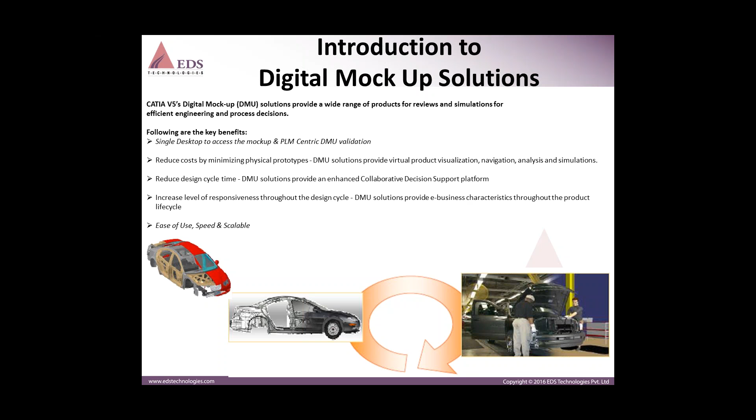First time right part and assembly development, life cycle driven engineering, account for manufacturing cost and process during early concept and design decisions. So any issues after making any assembly or in process planning we can detect in the early phase. Enable knowledgeable decision early in the development process.

That is, extended enterprise commonality, implement standard methods and processes throughout the supply chain for improved co-development, optimize derivative programs, sustain continuous improvement and leverage existing intellectual property in the same virtual environment, maximize reuse in derivative programs, short ramp-up time, implementation and achieve rapid value, minimize program risk, maintain productivity.

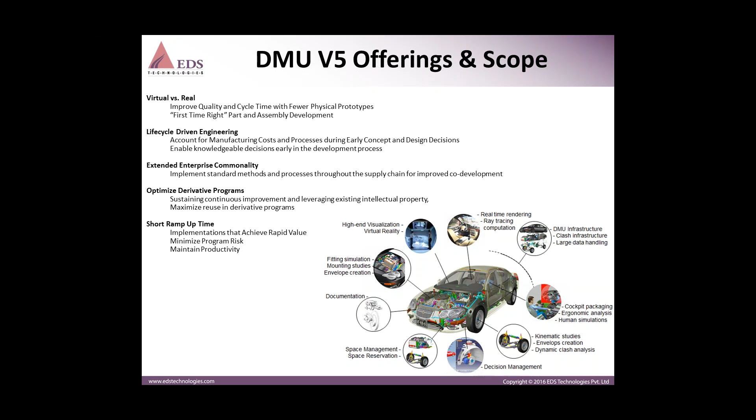Okay, so it is for digital prototyping, analysis, and simulations. The results of CATIA analysis or any third-party analysis you can view here as post-process images.

The DMU V5 solutions can address indifferently digital prototyping and review for small and large digital mockups, review of technological data related to DMU, including functional tolerancing information, FT&A information in 3D, finite element analysis post-processing shapes, like von Mises stresses or deformation and translation images we can see, and we can review that.

No need to go with GPS or GS environment to open the data. For plant and shipbuilding data, BIW fasteners information - whatever BIW fasteners are created in ABT license or automotive body unit licenses, those we can view in the fasteners review product.

DMU analysis with sectioning and measurements. DMU spatial integrity analysis with detection of interferences and clashes, completely in dynamic.

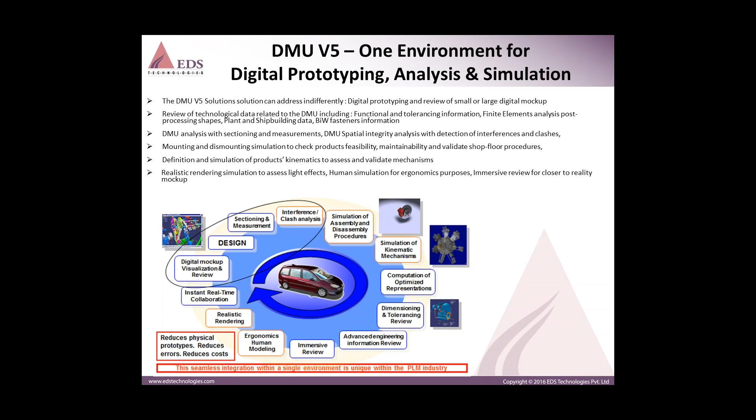DMU for the entire organization: using DMU solutions we can share complex product data across the organization for collaborative decision making, in the same CATIA environment. Only the product will be different for different people.

Synthesis teams, senior executives, technical publication, project leaders, designers, customers, dealers, sales, maintenance, suppliers, purchasing, shop floor workers, quality people, and production engineers - these people can use this for review or other purposes.

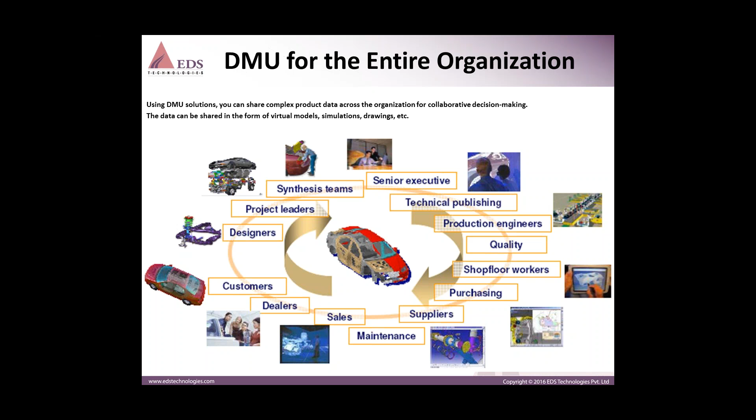DMU can be used by different user profiles in an organization, based on functional needs and DMU capabilities - designers, quality people - these are the verticals where people can use it.

For visualization purposes - viewing, printing, redlining, measuring. Customers like suppliers, dealers, sales, and purchase people can work with this.

For immersive reviews and virtual reality, designers, quality engineers, project leaders, synthesis teams, and senior executives can use this.

Simulation and definition, advanced analysis of interferences, and computation review - the DMU review and authoring team can use this, which includes synthesis teams and project leaders. So from high-end application to wide enterprise users, there will be users across the board.

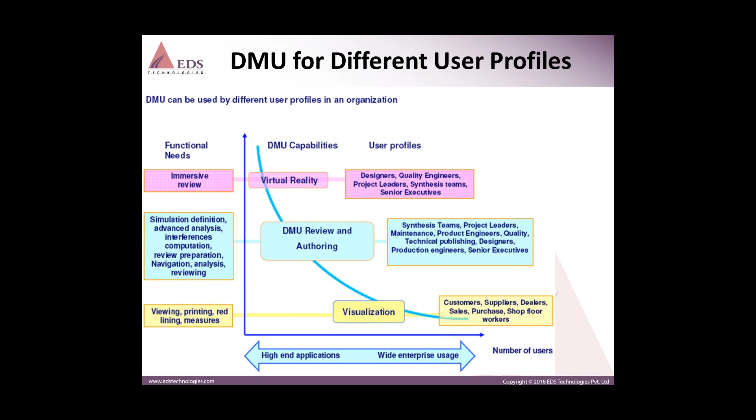We can create scenes. We can create distance band analysis. Sectioning we can save inside the application node. We can generate annotation views for review purposes. We can save interference check results.

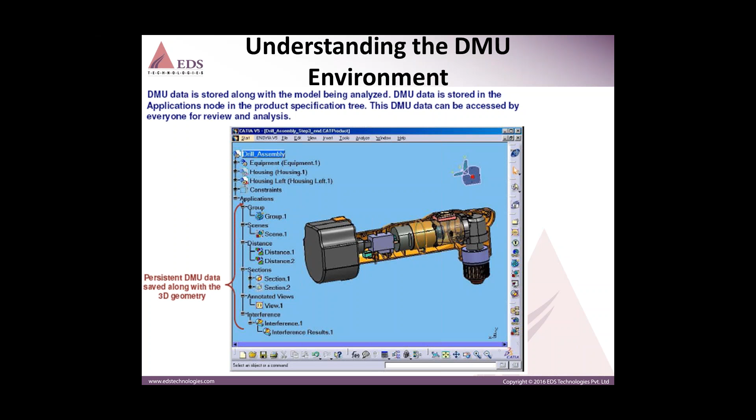This is a simple user interface. The product tree is there, components will be there, and the application node in which we can set some cameras. We can make groups.

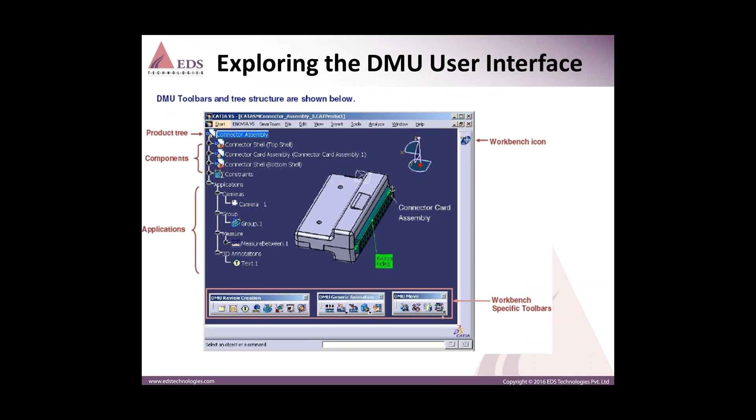The terminology is like this - if you see here, this is the general CATIA specification tree: root assemblies, components, and whatever the application is under the application node.

Suppose a sub-assembly is there - whatever we have created in DMU will go into the sub-assembly. And in the main assembly node, whatever scenes or DMU mockups we have created, it will come into the main assembly.

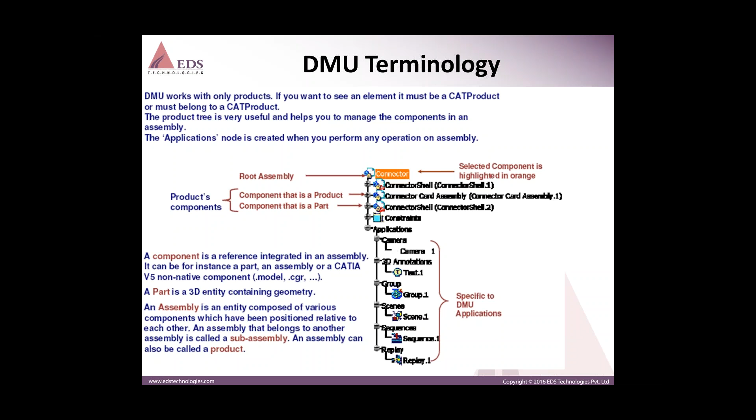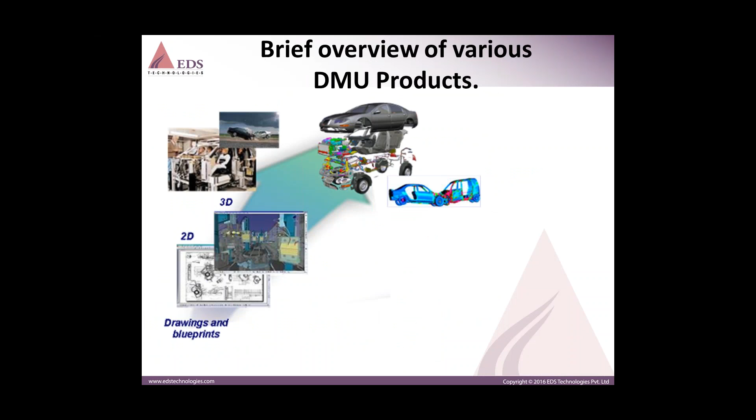Brief overview of various DMU products. DMU solution offers a wide range of products for performing reviews, presentations, and simulation of digital mockups of various sizes, from consumer good assemblies to very large assemblies like airplanes, cars, plants, and ships.

These DMU workbenches can visualize the assembly using tracks and simulations. We can create manual tracks, or create functional simulations to simulate the assembly's motion or disassembly process - both different products will be there.

Review the model using scenes, annotations, and presentations. Perform measurement, perform interference analysis, analyze sections. Reduce the size of the mockup using alternate shapes with the help of DMU Optimizer.

Simulate the assembly and disassembly of components with the help of DMU fitting. There will be DMU space, navigation, plant shape, engineering analysis review, and kinematics, which is mainly for simulation studies, fastening reviews, and DMU fitting - these are the complete DMU products portfolio.

Here, DMU Navigator is there. This is one product which provides collaborative review visualizations and navigation and communication capabilities for mockups with the help of tracks, cameras, or hide/show capabilities while simulating and creating mockups. It supports a large set of 2D and 3D formats, provides advanced measurement capabilities, allows optimum 2D viewing and 3D navigation for DMU inspections, and provides real-time rendering features.

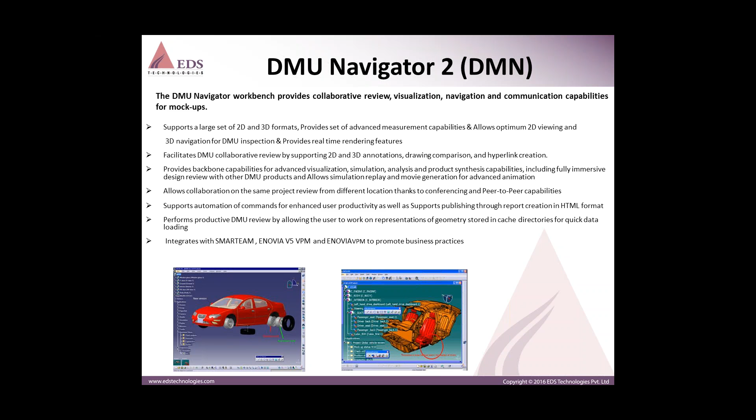It allows visualize and navigate capabilities with high rendering on large amounts of data, and DMU collaborative review by supporting 2D and 3D annotations. So these are the capabilities available with the help of DMU Navigator. Mockups we can create.

Here, this is the screen of DMU Navigator. So here, these observers we have created, some tracks we can create here. These are the toolbars. With the help of these toolbars, we can create a simulation player. Tracks we can create, sequences we can create for presentation purposes.

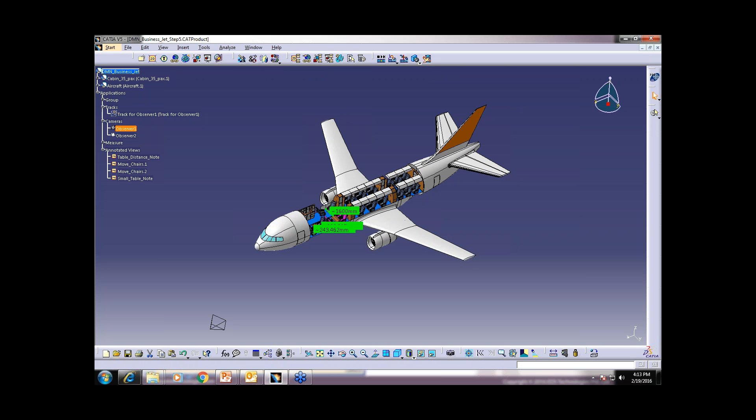We can highlight some clashes. We can publish with the help of some annotations. We can set hyperlinks, we can put annotations. If you see here, it will pop up some observers. So these cameras we can put in any cases.

DMU Space Analysis provides the capability for measuring and analysis of mockups, like creation of sections and exporting its geometry for other different reviewing purposes. It will measure and save the data inside your application node.

It enables optimum DMU verifications using advanced interference detections and analysis, superior sectioning, like thickness measurement if you want. This is not available in general cases, but if you have an SPA license, thickness measuring options are also available, along with superior section analysis, measurement, distance analysis, and 3D geometry comparison tools.

We can compare two geometries, revision 1 or revision 2, to see what modifications or changes were made. It will be highlighted with a color code.

It will measure sections, allow you to section, measure, and perform clash capabilities available in CATIA Assembly Design, but sections cannot be saved inside. There will be some limitations compared to those offered by SPA. In assembly, there are limitations to saving - we can create a section, but we cannot save or export the 2D geometry. If you see it in preview mode, this cannot be exported.

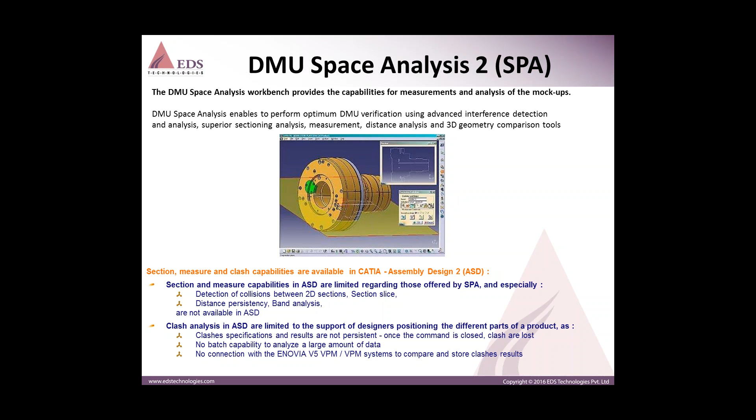Once the command is closed, clashes are lost - it will not save inside your product or assembly. There are no batch capabilities to analyze large amounts of data, and no connection with ENOVIA VPM and VPM V4 or V5 like PLM or BDM systems. So in Assembly Design, these are the limitations, but these can be offered with the help of DMU Space Analysis.

We can compare 3D geometries, visualize the result in a dedicated viewer, save the result for reuse, and perform sectioning on those 3D roles, those 3D color codes in a 3D environment.

There is integration with other DMU products for distance analysis of motion, simulations, and animation of section results. It allows automation through VB access for clash detection and band analysis, which we can use while creating kinematic simulations, to check interference in interactive mode or batch mode for large amounts of data.

It provides a set of exact measurements on and between products, parts, and features, distance and band analysis tools in color code, and allows analysis and storage of results in ENOVIA.

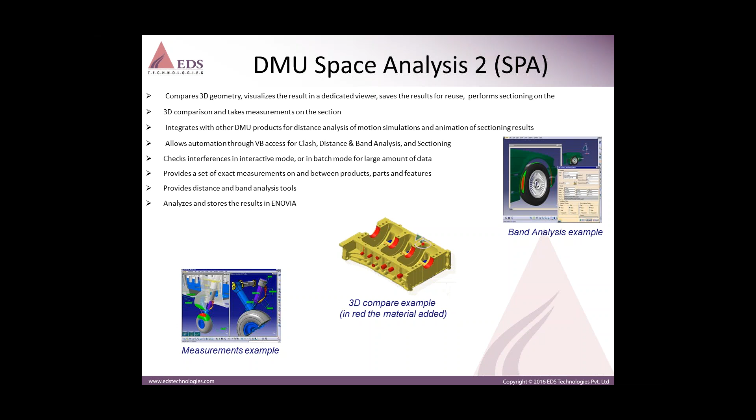These are some examples - analysis, 3D compare examples, red the material added. So there are two products which are superimposed, measurement examples. These are the capabilities.

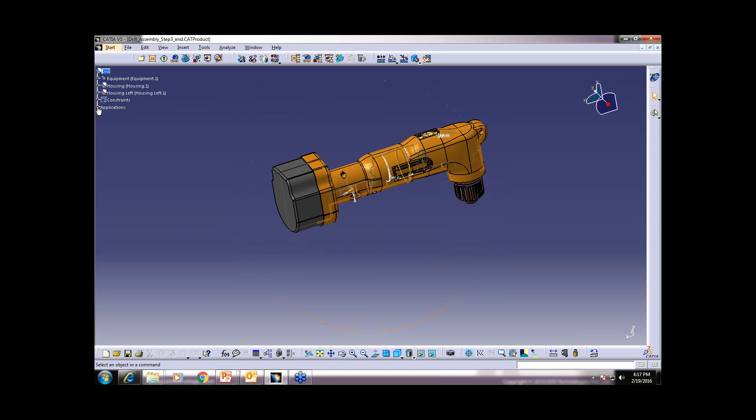In application node, some sections are already here. These sections are exported and inserted in this assembly. If you see these lines, these are the sections which are created here.

These sections we can export with the help of these commands, which are available with the DMU SPA license, not available inside your simple assembly design sectioning commands. With the help of this, we can reuse these curves and analyze, whatever color you have given to your products, it will highlight with that.

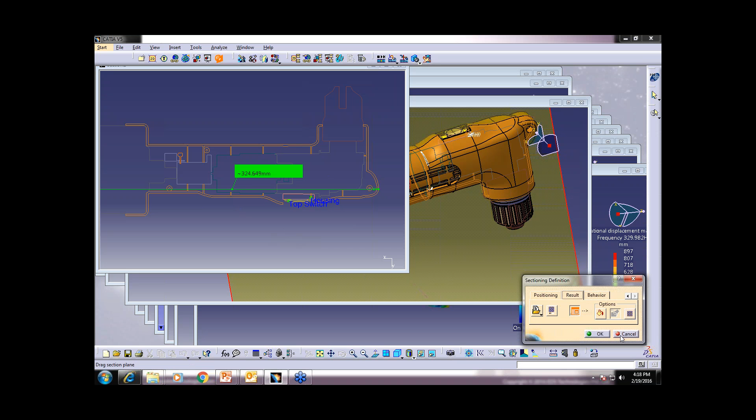We can put views and all, everything it will be detected here. Distance and band analysis, in color code, it will highlight it. So these capabilities are available in DMU space analysis.

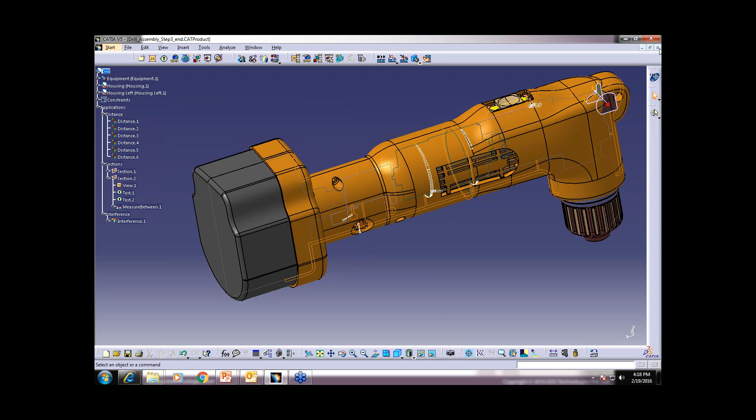In DMU fitting, we can do disassembly and assembly process with the help of some tools for process planning or feasibility studies. It is a dedicated tool to definition, simulation, and analysis of assembly and disassembly operations.

These operations help you to validate the product design with respect to the feasibility of its maintenance operations. Define single object or group of objects. We can make a number of components. Suppose 4 bolts are there, so you can apply in 1 bolt, and update that for other similar type of parts also.

Define single object or group of objects to move during the disassembly procedure. Generate disassembly trajectories, avoiding collision and respecting angular limitations. Interactively simulate object trajectory with visual feedback.

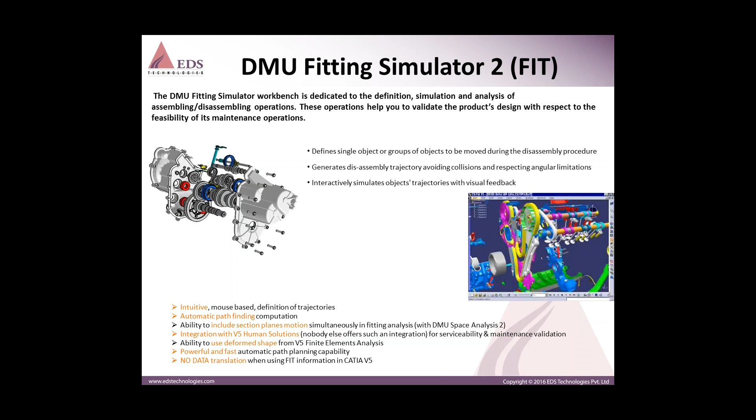Dynamic analyze simulated trajectory in order to validate their feasibility. So while creating dynamic paths, dynamically we can create the paths while moving your compass from one location to another. Automatically we can set snap kind of things. So while moving the compass, it will create the path.

Integrate with other DMU products for powerful combination of simulation, mixing clash, kinematics, or human manikins. Generate useful information on the space reservation in assembly, allowing designer to modify the digital mockup while respecting maintenance feasibility, with the help of swept volume. If you see in this image, this swept volume is created, and we can insert it inside our assembly.

Provide sophisticated simulation tools to increase collaboration between all project members and generate compelling marketing materials such as videos. It allows design validation packaging processes for product design, recycling, serviceability and maintainability departments, and integrated with kinematics solution also.

Exchange and downstream process, sharing design and packaging validation with suppliers, team members, customers. No need to send your native data, you can send only that swept volume, so people can understand, okay, this is the reserve area for this.

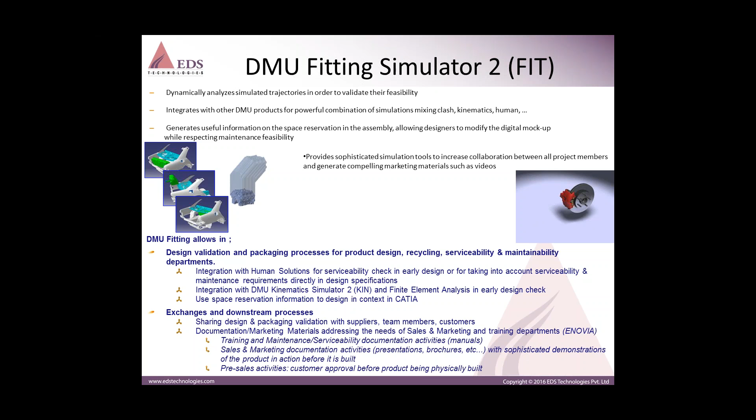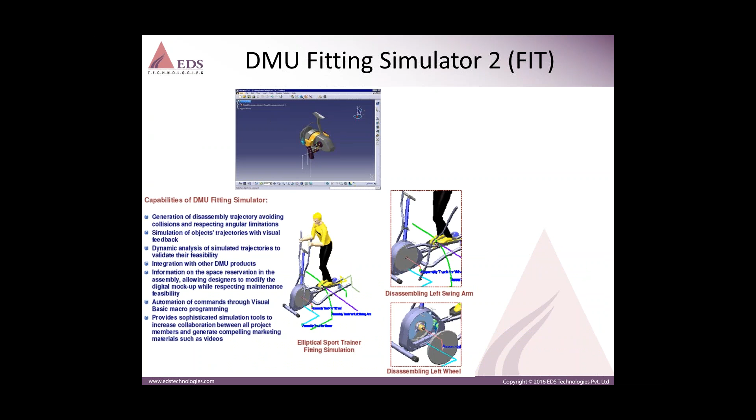If you see here, a small example of some disassembly of this.

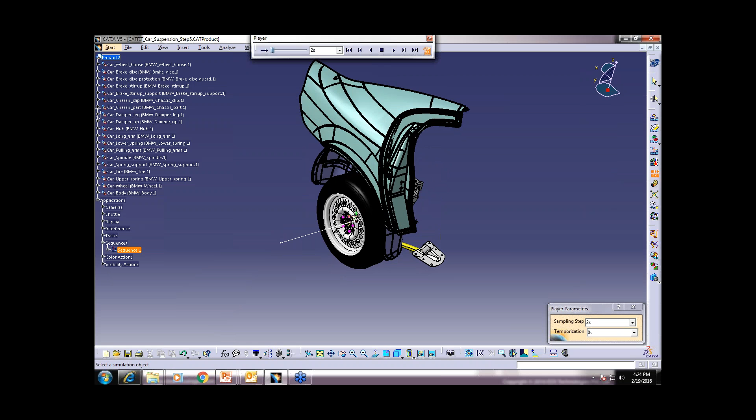So I have given some color code visibility also, so while removing, it is changing its color. Those visibility actions we can give, hide and show also we can give, so you can set a number of different colors. And at the end, it will be in hidden mode. So for any presentation purpose or any other review purpose or training purpose, it will be the best solution.

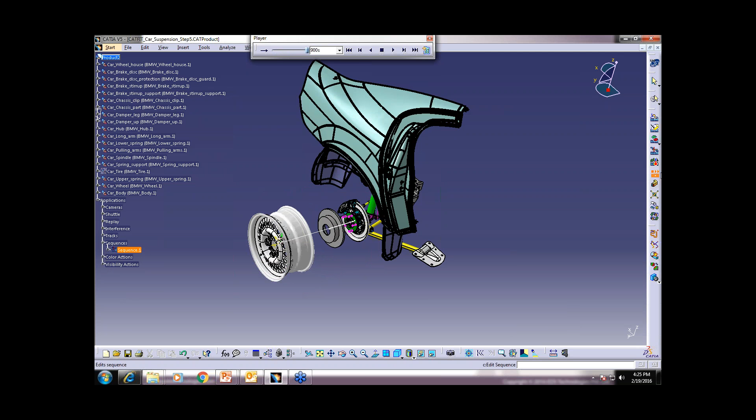Kinematics is a very strong tool to make a study of motions of whatever assembly mechanism we have created, whether it will be in good condition or have enough space for its functions. It may be a rotational function, a translational function, or point-surface functionality. It has a huge set of commands, like joints, which will completely fulfill our need to simulate any mechanism.

The DMU Kinematics Simulator workbench enables users to define, simulate and analyze mechanisms for digital mockups of all sizes using various joints, or by generating them automatically from assembly constraints. Any assembly constraint, like contact or coincidence, you can convert into a joint command, like revolute or prismatic joints. It is intuitive and mouse based, very user friendly: mouse-based direct manipulation of mechanisms allows easy comprehension of possible motions.

It offers the widest variety of kinematic joints, including point-surface and curve joints; with any involute or any kind of curve or point you can make a joint. Dynamic clash detection with unequalled performance during simulation. Ability to include kinematics and fitting simultaneously using sequences. Hide, show, or color actions created in fitting can be incorporated inside these kinematic simulations.

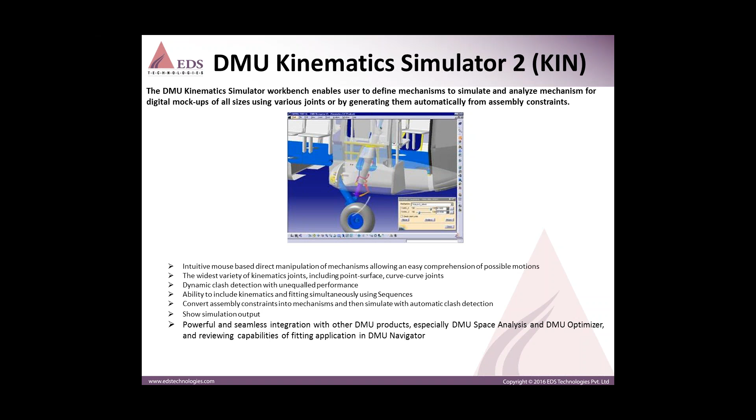Use a wide variety of joint types or generate them automatically from mechanical assembly constraints in ASD products. Easily simulate mechanism motions with mouse-based manipulation, or you can use a player. Analyze mechanism motions dynamically with visual feedback to check limits and interferences and compute minimal distances. The kinematics created here is logical, mathematically based. We are not just giving a distance or speed and it moves accordingly; it moves functionally. If your input is 70 RPM for 360 degrees, we can simulate that with a specific time or law.

Even the gear ratio is automatically detected with the help of the addendum and dedendum circles of gears. It records motion analysis results to increase accessibility of simulation results, generates the trace or swept volume of moving parts to drive further design, and allows combined simulation through integration with DMU products.

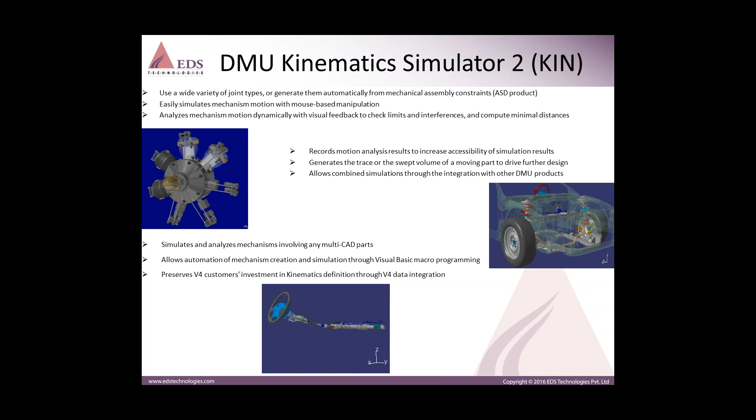It will simulate and analyze mechanisms involving multi-CAD products, allows automation of mechanism creation and simulation through Visual Basic macro programming, and preserves V4 customers' investment in kinematics definitions through V4 data integration. Model files or any other V4 files you can integrate and insert. These are the capabilities: automatic generation of mechanisms from mechanical assemblies, and simulation of mechanisms in order to validate them.

If you see here, there are some joints we have incorporated. This is the structure of this mechanism. We have created a lot of joints: revolute joints, cylindrical joints, slide curve joints. Many joints are there. All types of joints required in our industry for the simulation of any mechanism are available here.

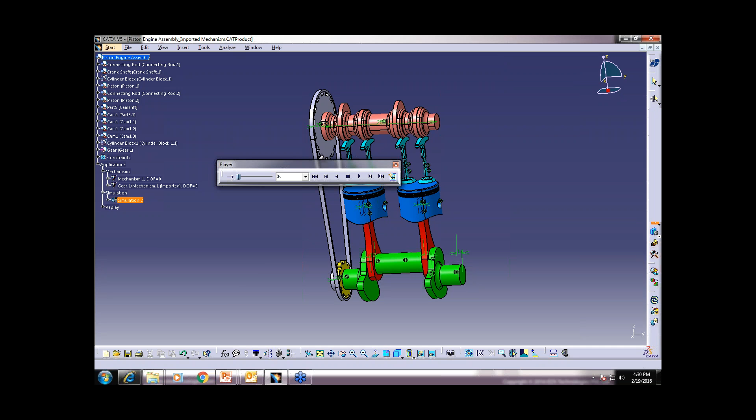We can simulate with the help of this player. We can make it a slower speed. It's too slow. So with this simulation, we have given it according to the functions, and it is not dynamic, it is only kinematic simulation.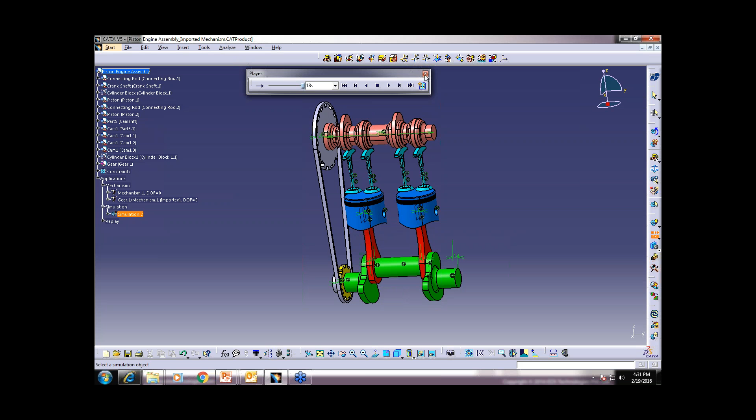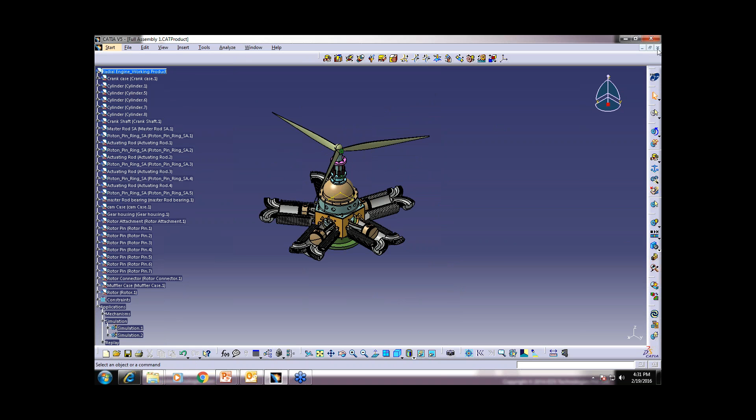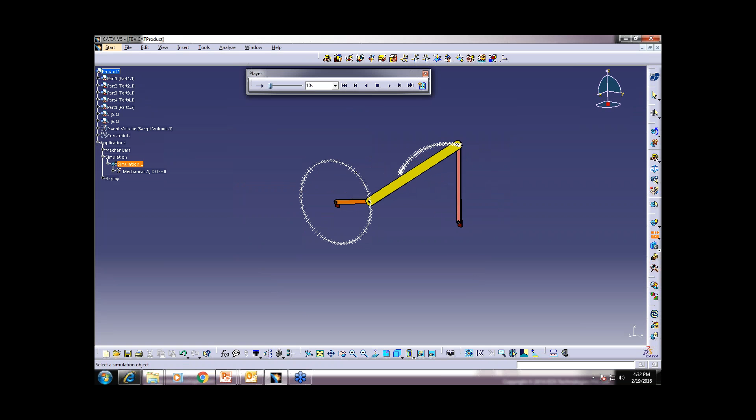Here we see a small assembly. This kind of mechanism we can also simulate, or we can generate its swept volume, to see how much swept volume it occupies. So here we have created a swept volume for all the components.

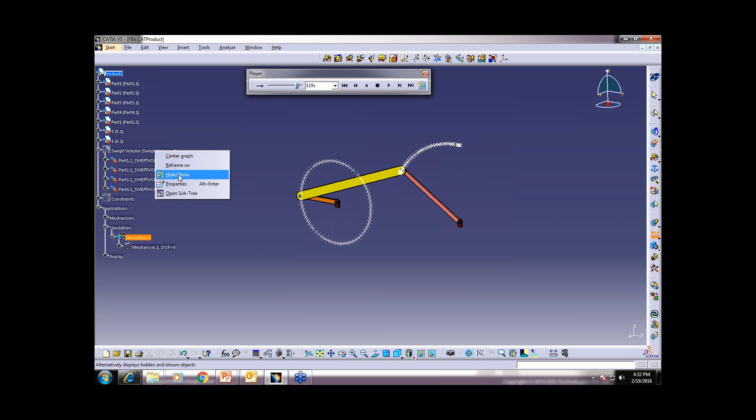We see here the swept volume we have created. It is the area of travel occupied by this component, so our design should be according to this. This review capability is available with DMU Kinematics or fitting. So we can create a swept volume with the help of this.

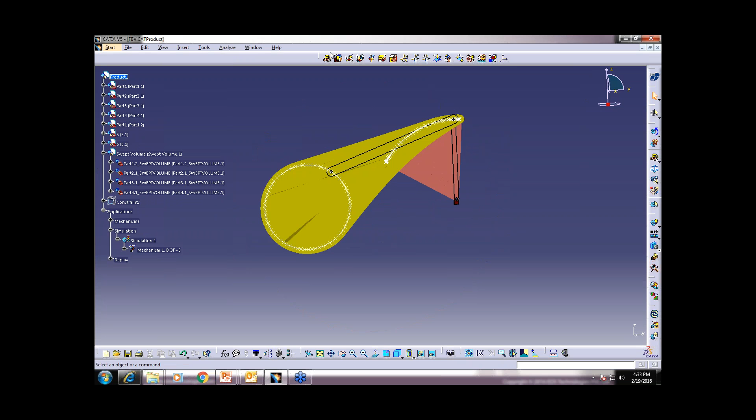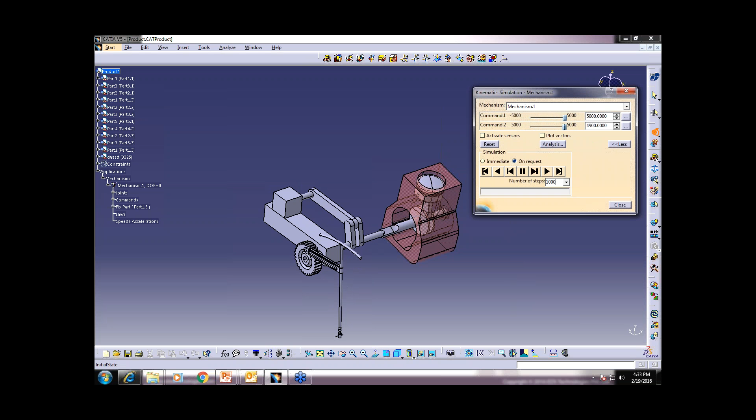Generally here two commands are there, but it should be one command in any case; only then will our mechanism be proper. In some cases it is not allowed to create one single command, so in such cases we have to create two commands. It is too fast. So this way we can create it.

Here we have created many joints, including cylindrical and prismatic joints. So we can create logical joints, and this simulation will be logical. It is not just that we have given some distance and it travels accordingly.

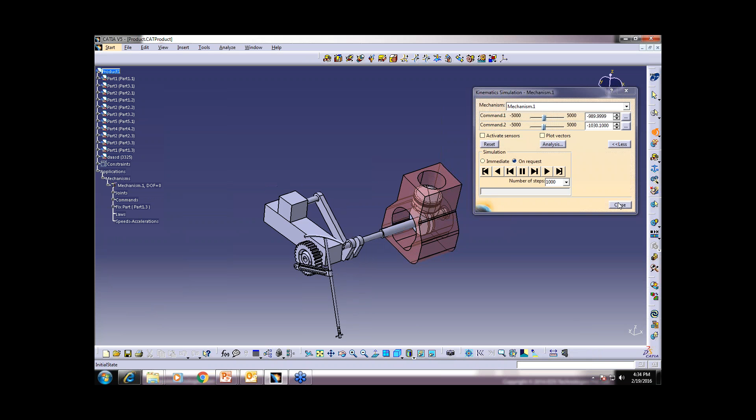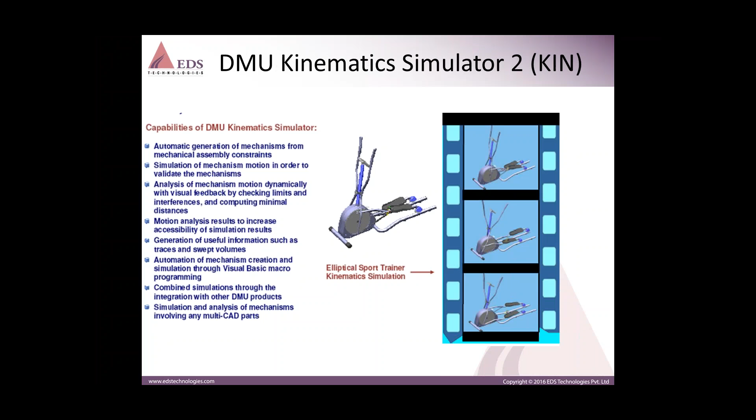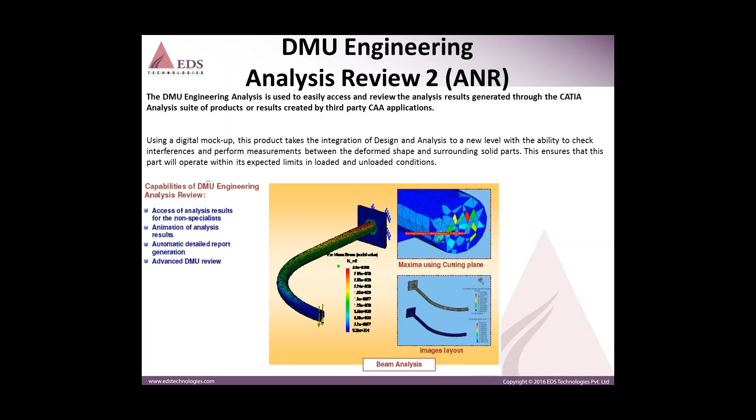Analysis data browsing, geometry feature based pre-processing specs, FEM based data images. These images we can visualize with the help of this DMU product. Standard analysis tools, automatic HTML reporting of analysis cases. The same is possible in GPS/GAS also, but for review purposes they can see it here. Wide range of post-processing tools. Integration to digital mockup for space analysis, fitting, player, or publishing tools. Publishing tools means we can mark up annotations or text in the review folder. And it doesn't require any GPS/GAS prerequisite.

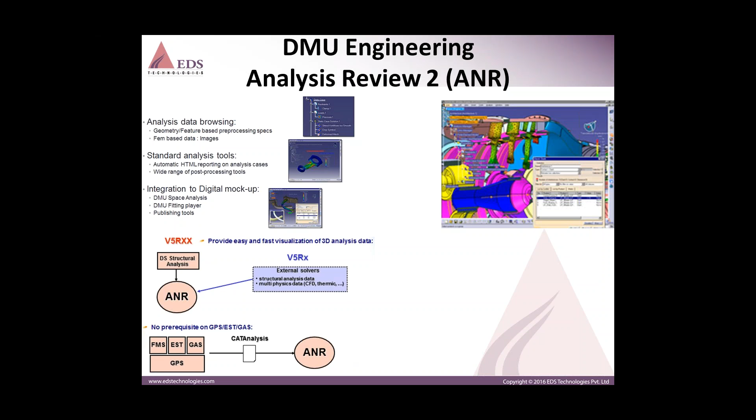Here, if you see, these are the images we have created. This is DMU Engineering Analysis Review, the workbench. The review purpose tools will be available here. We can generate an image from existing images, or we can generate the report with the help of these toolbars. We can add the images and save at specific locations, static case or frequency case.

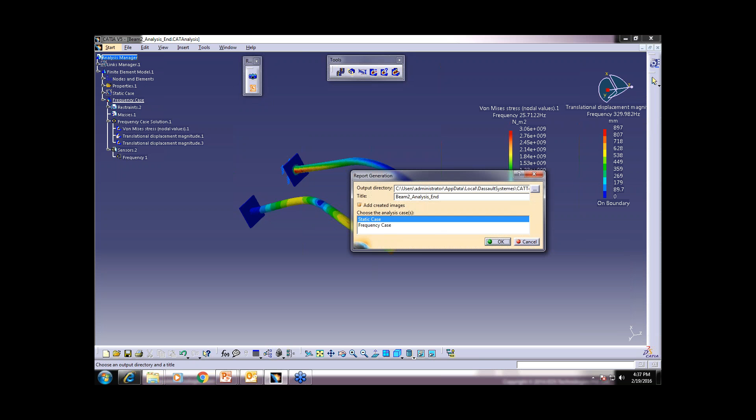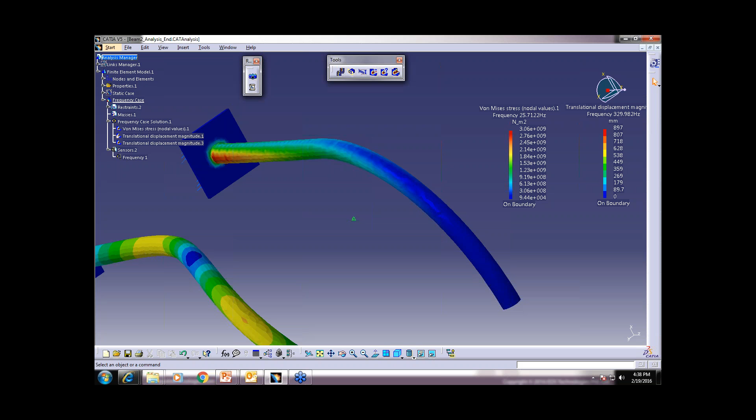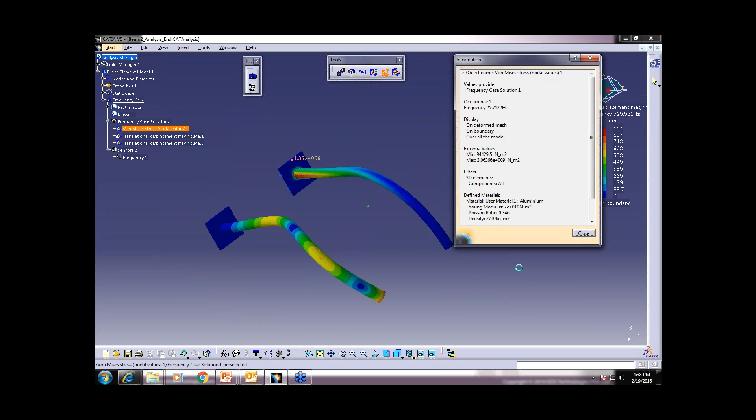So here the same results are available. We can even animate: suppose this von Mises stress we have to animate, we can see where the stress is moving. At this corner, the red color is the higher stress concentration area, and the scale is available here, for translational displacement, and this for stress. We can see maximum and minimum with respect to material, or we can see the information of this von Mises stress, what frequencies are there, or the static case.

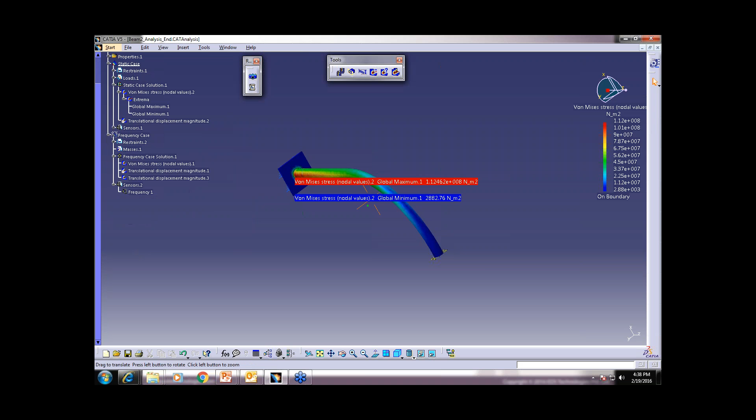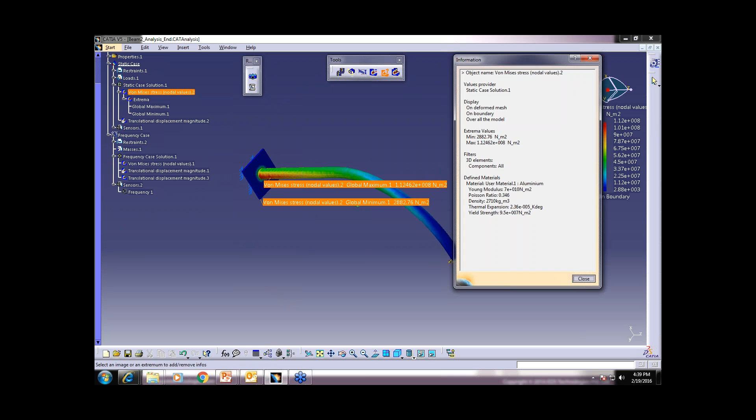Set as current. Here we can get the information regarding this. The maximum stress will be this and the yield strength will be this. So it is going out of range, and the factor of safety. So this model is going to fail at this location where the maximum stress is coming, so we need to change the design. These capabilities are available with DMU Engineering Analysis Review. We can review here and publish all those reports.

DMU Fastening Review is the tool that provides advanced fastener technology validation and documentation capabilities for automotive BIW design and product planning processes. Using DMU FAR, users can create and visualize body in white fasteners' functional annotations created in CATIA Automotive Body in White, including 3D fastener annotations, for instance weld IDs and build parameters, and we can pick those points. And 3D fastener series annotations, for instance weld series IDs and fastener series count numbers.

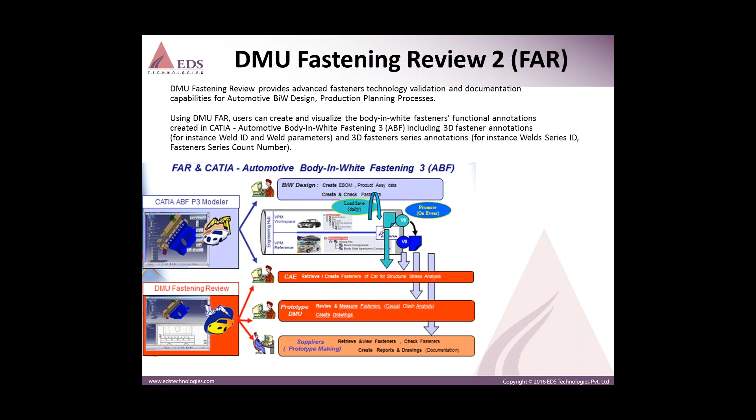If you see in the image below, FAR and CATIA Automotive Body in White. Body in white has very large capabilities for BIW components. With DMU Fastening Review we can review major fasteners and create drawings for those points, weld points especially. It allows visualization of those points. We can search the fasteners by properties, measure those 3D points, check the design, review it, and simulate mechanical behavior.

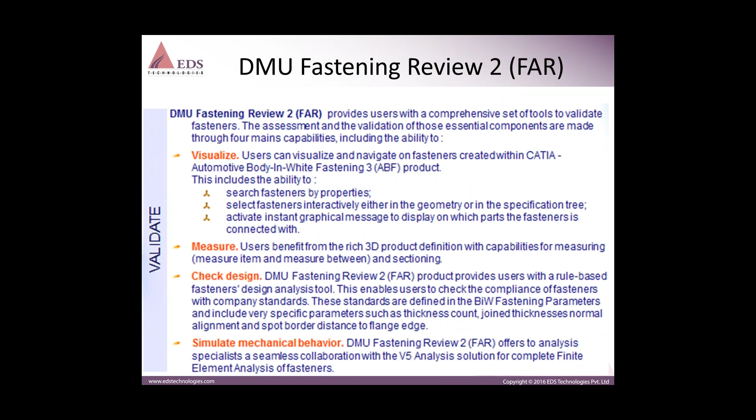We can review and publish the fasteners for further review with our clients. We can generate a complete report for fasteners and use it for analysis purposes, and create fastener drawings, because that data will not come if you save as IGS or STEP. So for that, this report is required.

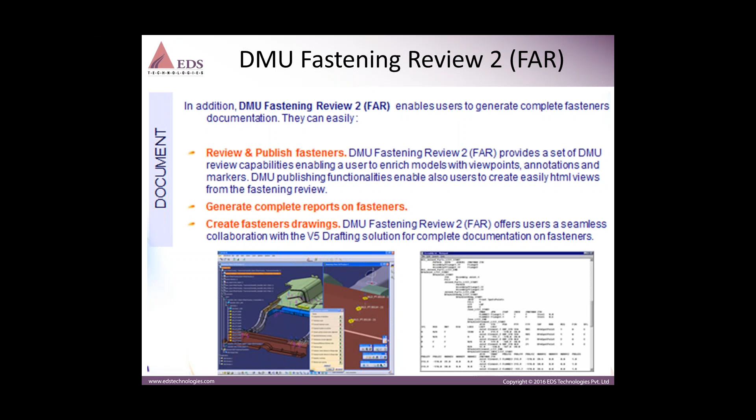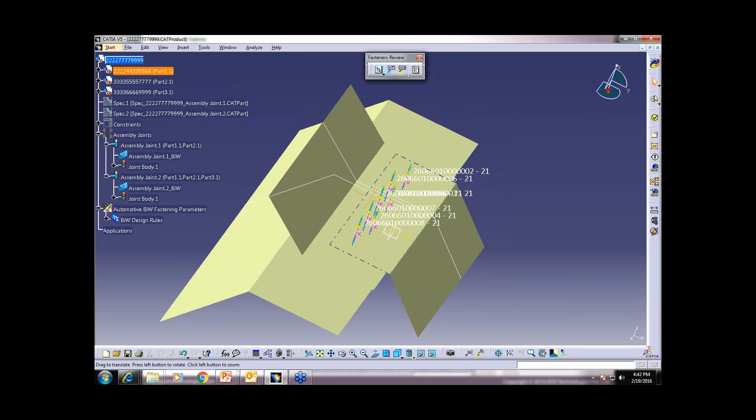If you see here, these are the weld joints created with Automotive Body in White, which is a P3 platform. I am able to pick this point because I have the DMU Fastening Review license. Otherwise we cannot pick these things; it is non-pickable because it requires a license. For the points we created, we can generate reports with BIW reporting, and this text or HTML file will be saved at a specific location for use.

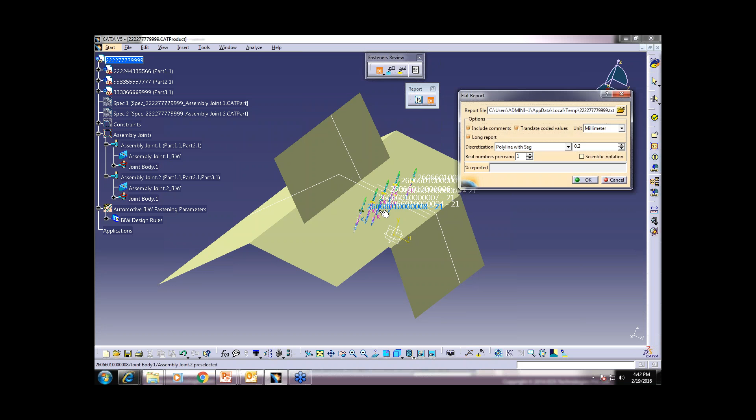Flat reporting is generally required for analysis purposes, because we don't have this data inside our STEP or IGS file. So we require this text file for analysis in other analysis software. This capability is available with the FAR license. This is DMU Fastening Review.

Optimizer is generally used for creating alternative representations of products or assemblies for size reduction or geometry creation better adapted to a specific context. If you don't want to show our data to a vendor or supplier, we can send the data in this dump format, which is a tessellated format, or in a swept volume format, we can say.

DMU Optimizer has the ability to combine mesh simplification with other functions such as swept volume, wrapping, and silhouette. Generally, it is used for packaging purposes also, providing powerful digital mockup management tools. Vibration volumes we can create. Mesh simplification commands are available. Combining mesh simplification with silhouette, wrapping, and swept volume functions shows the powerful impact of wrapping representation when used in conjunction with mesh simplification.

Generate wrapping surfaces or volumes, generate silhouette surfaces, generate thickness, generate offset, generate swept volume, free spaces, and export representations resulting from mesh simplifications in STL format. So nobody can measure that.

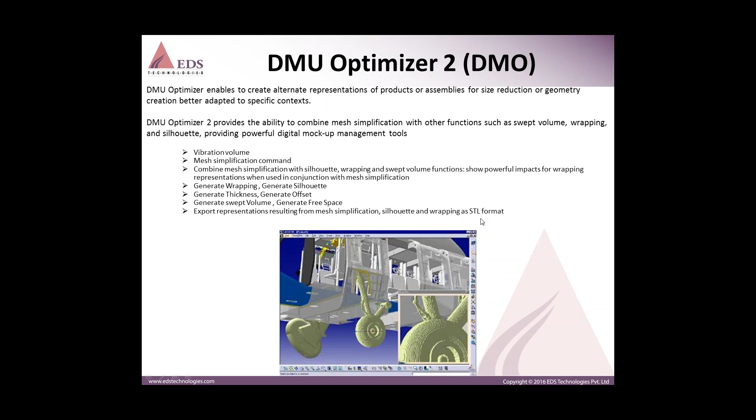It converts surfaces into volumes for realistic digital mockup analysis in thickness format, and takes into account security margins by adding an offset value to a selected set of shapes. We can change the dimension of that shape, dummy dimensions we can put, so that nobody can duplicate our products.

We can perform space reservation by generating the swept volume of moving parts, so that people or further suppliers cannot create any obstacles in that swept volume. They will design their data except in this space.

Generate the maximum global sweeping envelope of vibrating parts and vibration volumes. Facilitate further analysis and design in assembly by visualizing the free space. Manage the different representations by saving and reusing them for productive DMU review and analysis purposes.

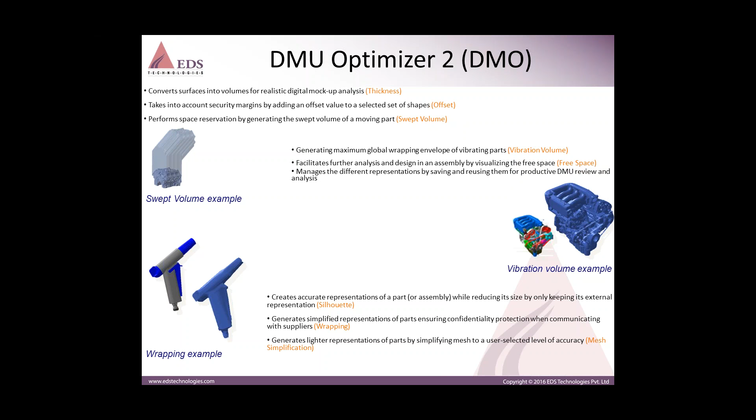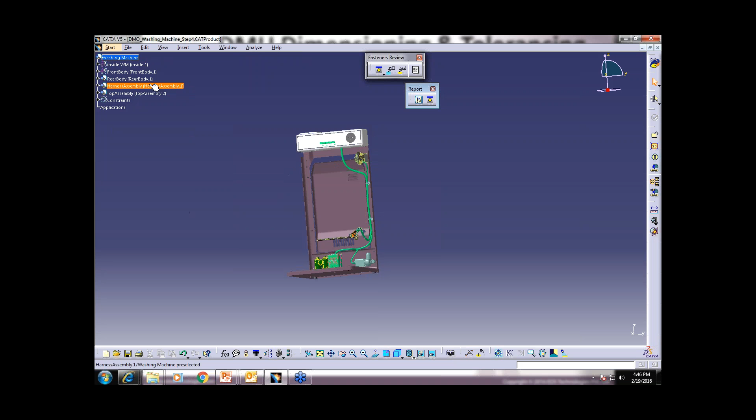It will create an accurate representation of a part while reducing its size by only keeping its external representation. It generates simplified representations of parts, ensuring confidentiality protection when communicating with suppliers. Generate lighter representations of parts by simplifying the mesh to a user-selected level of accuracy. Here I will show you. The vibration volume, if you see.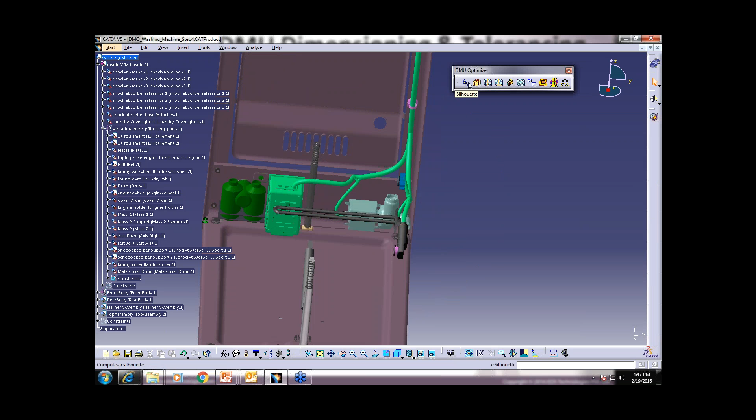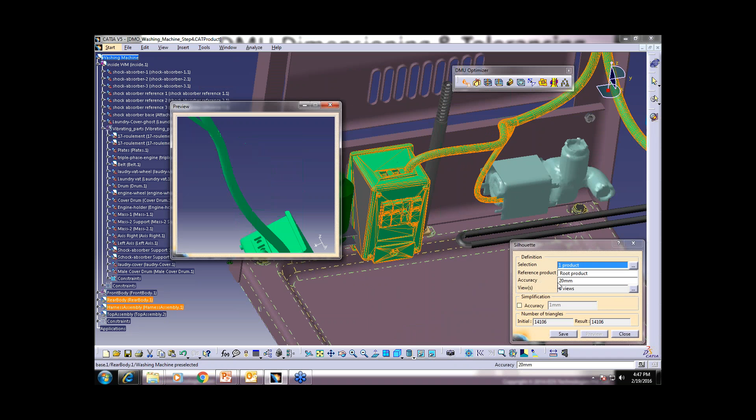These are the tools which will help you to make silhouettes. Suppose we want to hide information on a part which is a patented part, so we need to keep security for this particular part. So we can create silhouettes for this part. You can see the preview. We can put it in a reference part or any other part, or we can save it.

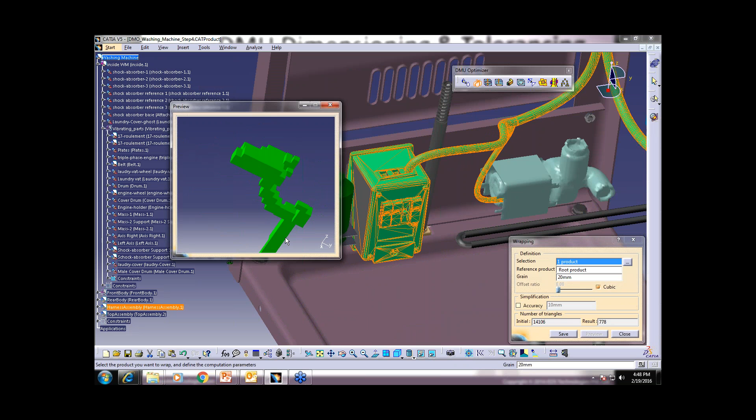We can create a wrapping surface for this part. So if you see here, with accuracy level 0, it is cubic. So it is in cubic format, it is not in the actual format. So we can say this space is majorly occupied by these components. We can create thickness faces for this. We can create offsets, so the offset value we can give here, and it will change the dimensions.

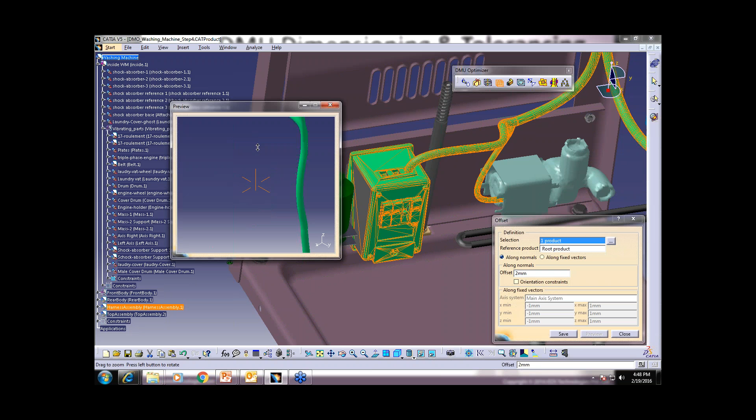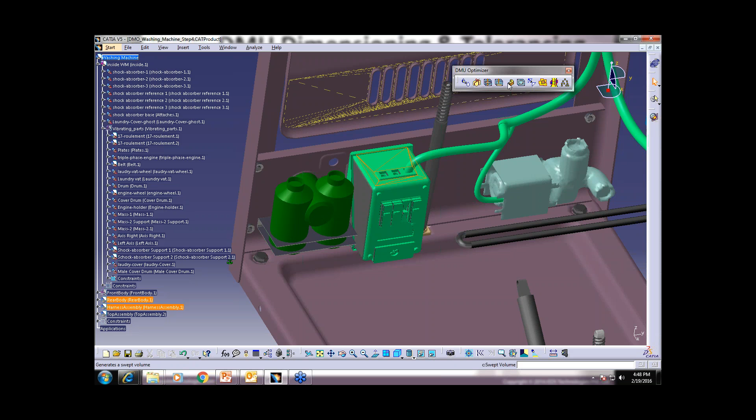Or we can keep 10, so accordingly it will change its shape. Many others like swept volume are also available, which require different commands. Free spaces, we can say here, the free space required for this.

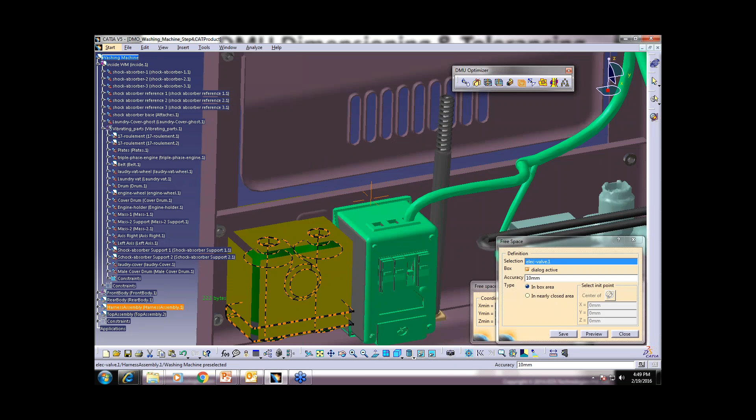So this is a free space for this component which is reserved, or any component you can take. For example, this component you can take. I want to keep a free space for this. So instead of giving the actual component, I can give this shape to my supplier by saving it to any location.

DMU Dimensioning and Tolerancing is generally used for 2D and 3D visualization of tolerances in digital mockup, which are created in FTA data, or any annotations created at part level, like any text. Advanced capability to filter the display by criteria, elements and features. Complete two-way associativity between dimensioning and tolerancing annotations, geometrical elements and features created in the 3D environment.

Support of data designed with the functional dimension and tolerance functions in CATIA CADAM Version 4, which is an older version of drafting. Benefit from the full integration with the ENOVIA DMU line of products. Save FD&T functional dimension and tolerance documents in VRML format for review and distribution in a standard browser. Support for CATIA V5 functional dimension and tolerance annotations in FT1 or FTA.

Suppose model-based design people are using this, and this 3D annotation data is there. For reviewing purposes, they can use this. They can select.

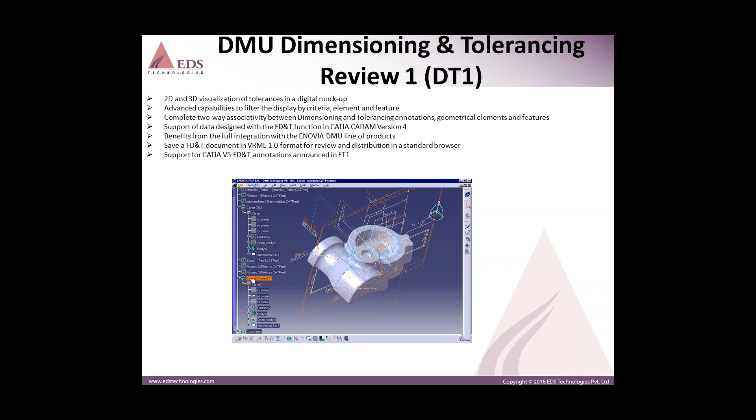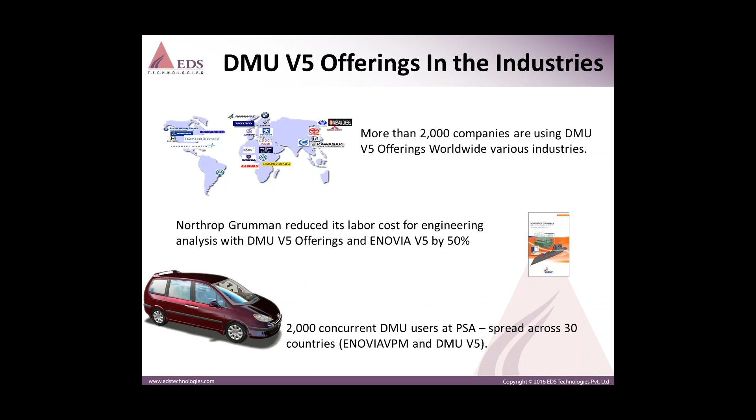So these offerings are proven. These are the companies; most of the companies are using them. In industry, more than 2,000 companies worldwide across various industries are using the DMU offering. Some customers use them here. So these are the few customers' faces, customers' voices.